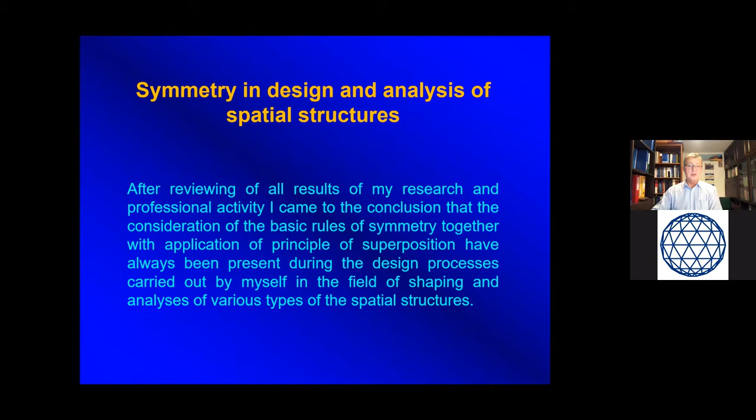The general title of my presentation is Symmetry in Design and Analysis of Spatial Structures. After reviewing the results of my research and professional activity, I came to the conclusion that consideration of the basic rules of symmetry, together with application of the principle of superposition, have always been present during the design processes I carried out in shaping and analysis of various types of spatial structures.

In one of my first projects, I proposed a spherical form of crystal space frame as the support structure of a dome, having an interesting exterior architectonic view and at the same time advantageous conditions for daylighting of its inner space.

Three decades ago, the process of preparing a series of similar technical drawings took me several weeks. During this work, I studied morphological aspects of a very modern structural system of the cable dome proposed by David Geiger. From this time, I had an idea how to design a similar system based on suitable transformation of the spherical form of a space frame.

As a result of my cooperation with the Space Structure Research Center at the University of Surrey, I had the opportunity to study and learn the principles of Formex algebra and the programming language Formian, invented by Professor Hoshyar Nooshin and further developed by his team. My ability to practically apply various functions of Formian has enormously enriched and accelerated my research and professional activity.

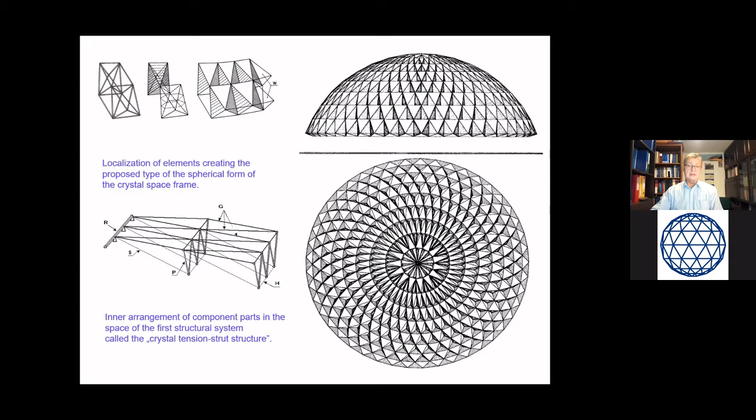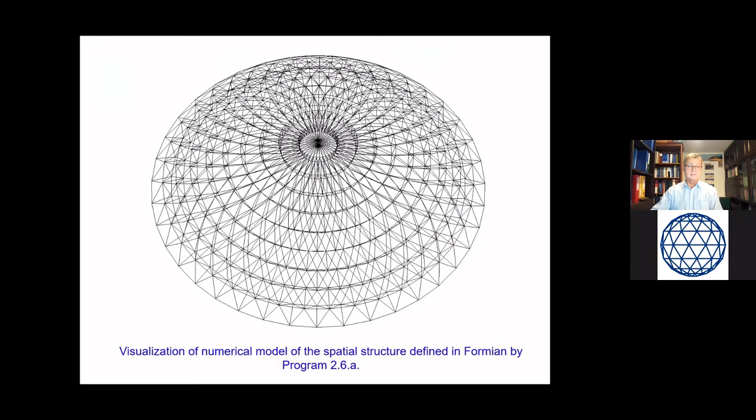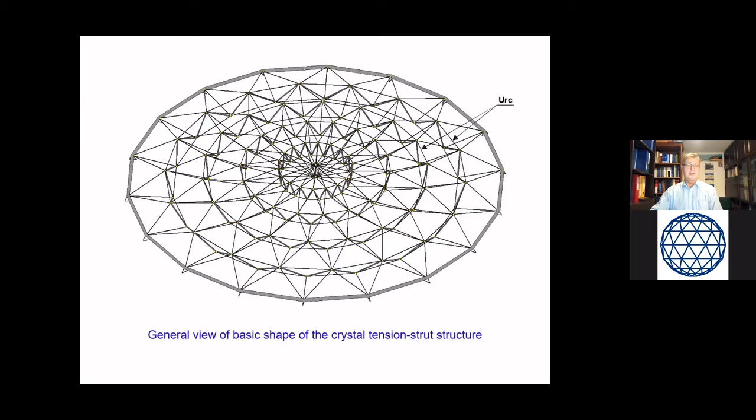The spatial structure is also built of tetrahedral modules, spaced and alternately located over every second lower triangular area of the funicular truss, and suitably connected together as well as to the compression perimeter ring.

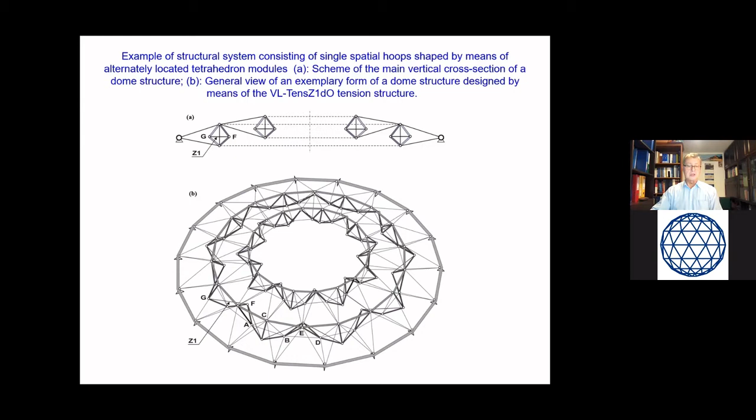The vertices of the tetrahedral modules are joined together by relatively long cables, and together with other tensile members, they create a huge double form of the concentric hoop.

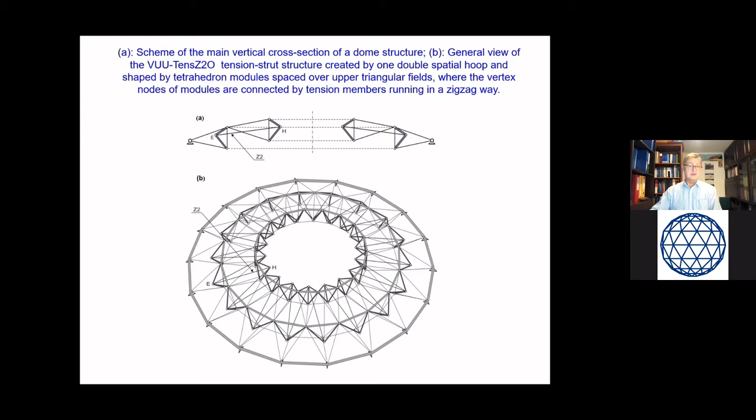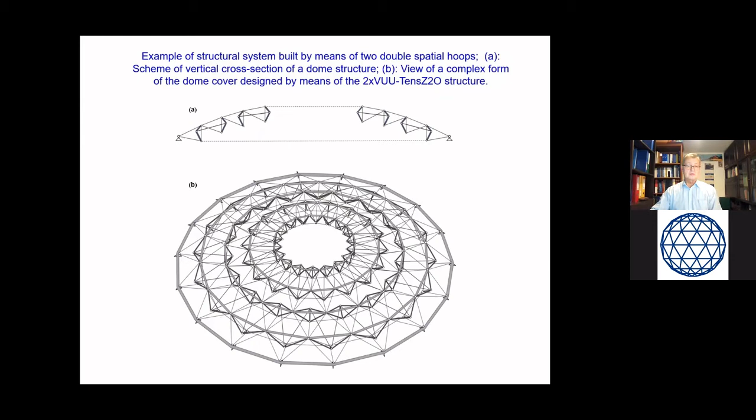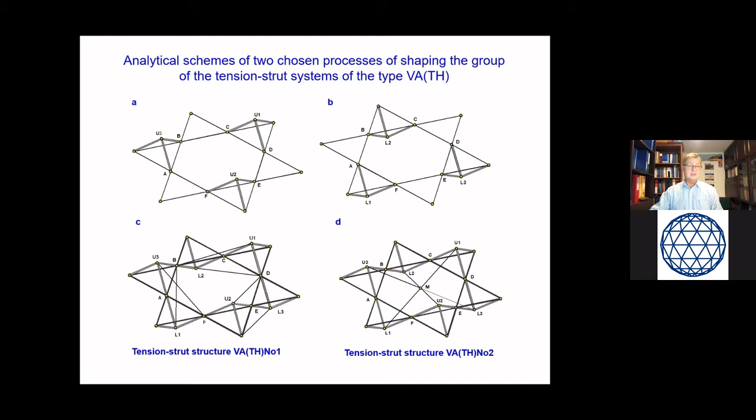The next group of structural systems is shaped by using the same type of tetrahedral modules, arranged this time above and below the triangular hexagonal grid composed of struts located in the middle layer of the created spatial structure. Vertex nodes of these tetrahedrons can be connected in various ways.

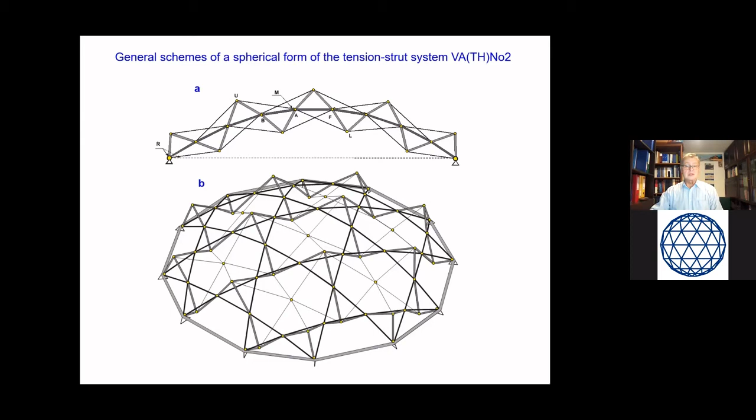In my opinion, the structure VATH number 2 has great development potential, because a suitable arrangement of, for instance, membrane sheets will give a very interesting architectonic form to the roof structure.

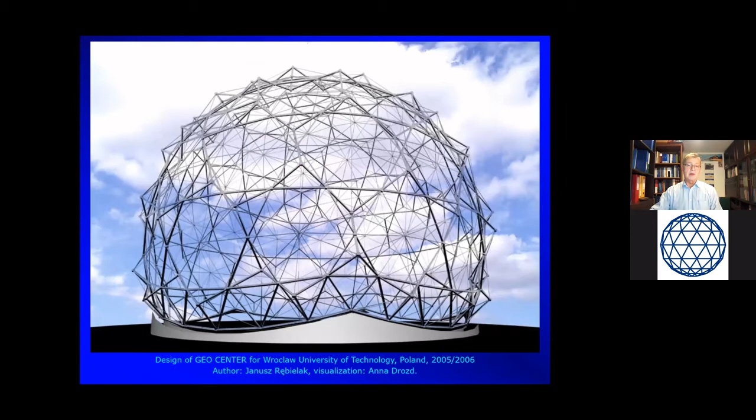That is why I propose the spherical geodesic shape of this system as the support structure of the central building of the previously designed new campus of my alma mater university.

In the conceptual design, the building was intended as a testing object to carry out long-term strength research and also testing of various types of cladding systems.

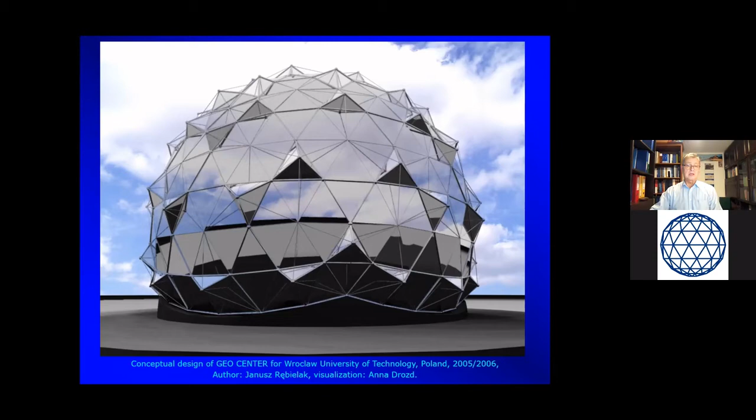Support structures of tall buildings can also be accounted among the wide family of spatial structures. So far, I have proposed two types of foundation structures.

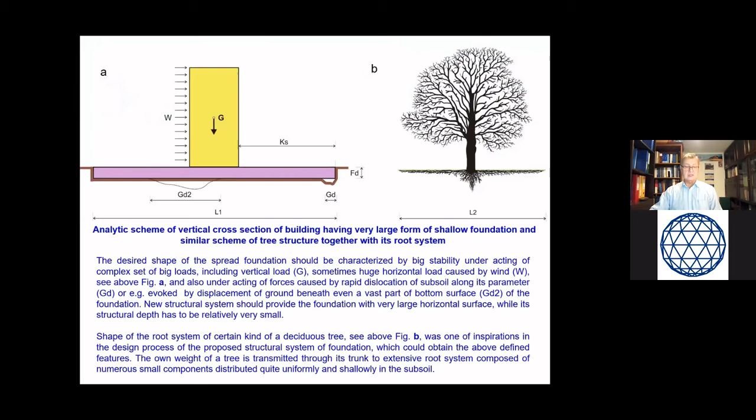The structural concept of the final shape of the system, or of the system of composite foundation, is presented in the next slide. The point of the proposed technical solution is as follows.

In a narrow space between two horizontally located beams, an intermediate structural system is arranged, connected to these beams by means of structural nodes, theoretically articulated nodes or joints, uniformly distributed along the neutral axis of the beams.

Outer force is transmitted via the short vertical member and by means of the intermediate system to the structural nodes. The intermediate system is built of two subsystems. The first one is called a funicular system, located below the neutral axis, while the second one is called an arch system, placed above the neutral axis of these beams.

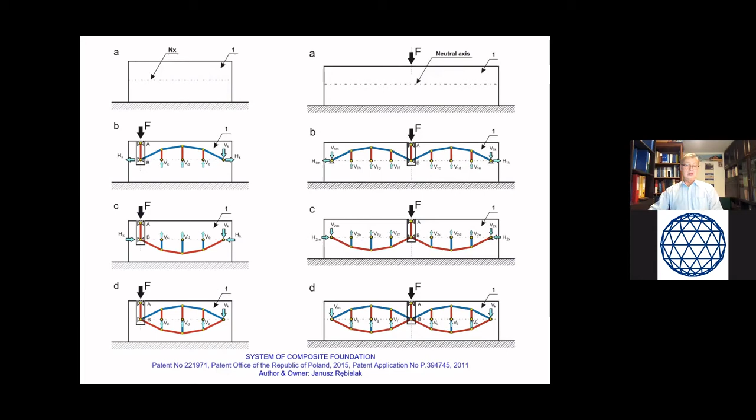When patterns of both subsystems are symmetrical towards the neutral axis, and when they are combined together, they create only vertical components of reactions acting in the boundary areas. The loads can be applied in various symmetrical, eccentrical ways.

Nodes of the type C1 and C2 mustn't be connected to the main beams of the structure. The lenticular form of the intermediate system placed between these two nodes is considered as the modular unit of the foundation. It can be repeated many times along the horizontal direction.

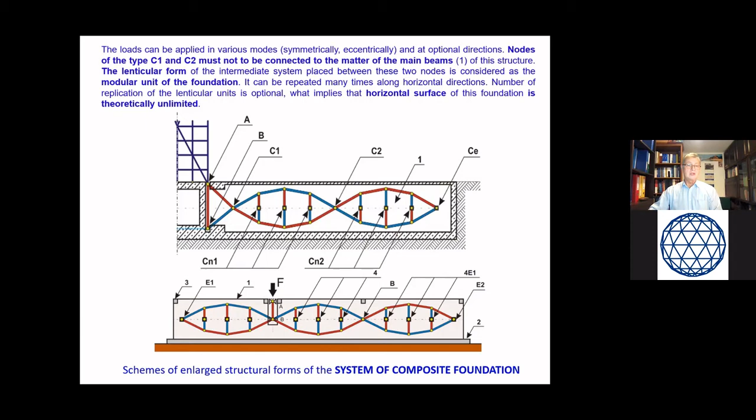Number of replication of the lenticular units is optional, which implies that the horizontal surface of this foundation can be theoretically unlimited. This structural system of composite foundation can be a base for various shapes of megastructures.

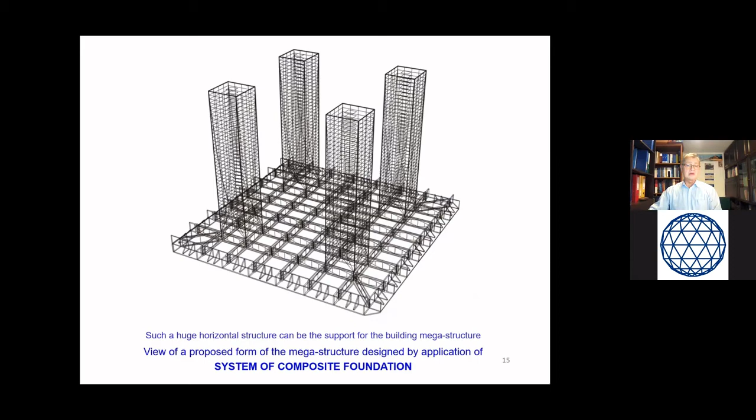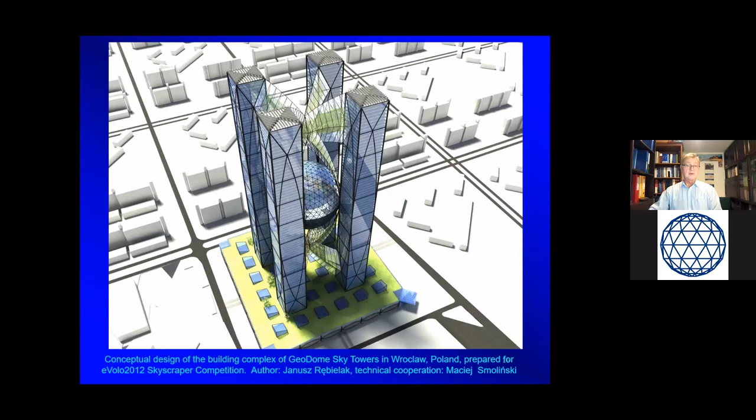I have proposed this system of foundation as a structural base in the conceptual design of a megastructure called the Geodome Sky Towers, prepared for one of the architectonic competitions. The towers are of height around 380 meters.

The support base has the form of a square. Its edge length equals around 250 meters. The geodesic sphere has a diameter equal to 100 meters.

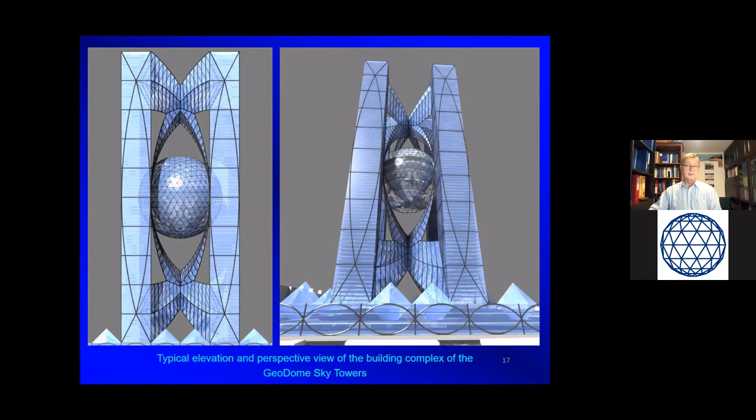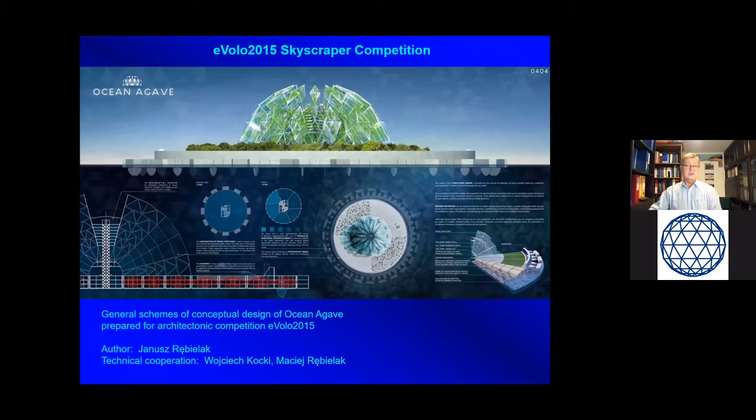I have proposed again the system as the base structure of an artificial island in the conceptual design entitled Ocean Agave, prepared for another issue of the series of architectonic competitions.

It is designed as a floating structure in subtropical ocean areas, far from land, being a settling unit self-sufficient in terms of energy and food supply, able to house a group of around 150 persons. The circular platform of the Ocean Agave has a diameter slightly more than 400 meters.

Spatial modules of this system of combined foundation can be made as huge waterproof boxes having substantial uplift pressure. That is why they could be the component parts of an artificial island able to float on a lake or on a sea.

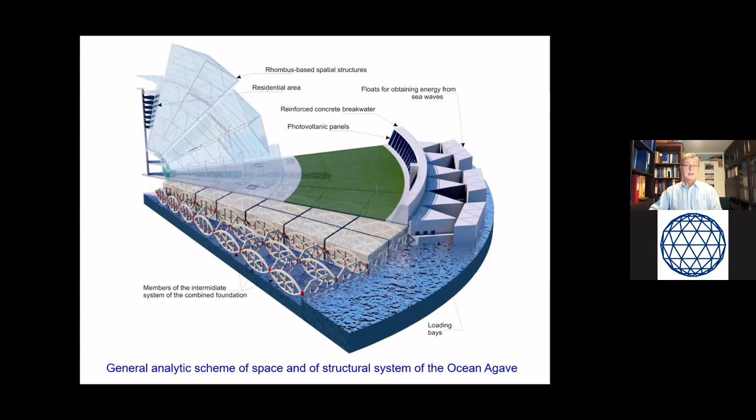Taking into consideration the basic rules of symmetry is also very helpful in the methods of static calculations. During my research stay at the Delft University of Technology, I was given a task to do an initial static analysis of one of the tension-strut structures proposed in my doctoral thesis.

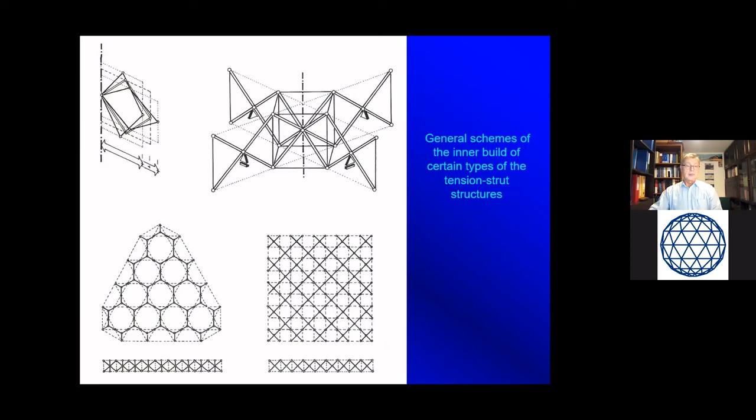Beforehand, I was required to do a physical model of it. The static scheme on the left-hand side of this slide shows a simplified cross-section of the structure, representing a fourfold statically indeterminate tension-strut truss.

When that system is overloaded, the four members of the top chord are slackened, which implies they are excluded from the force transmission. Therefore, the scheme of the overloaded structure shown on the right-hand side represents a statically determinate truss or system. The number of excluded tension members equals 4, equal to the statically indeterminacy of the basic truss system.

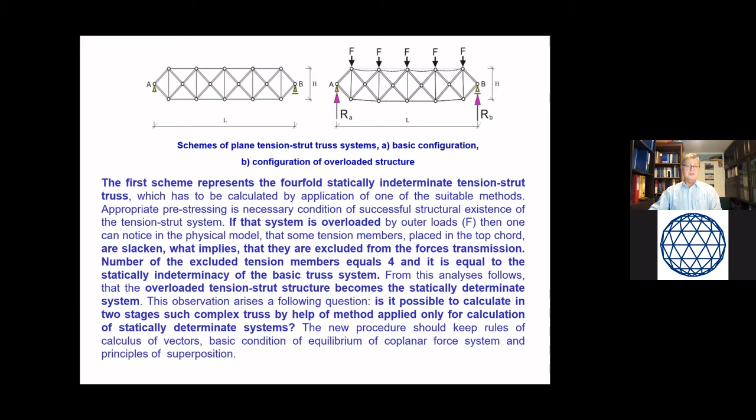This observation raises a following question: is it possible to calculate in two stages such a complex truss by help of a method applied only for calculation of statically determinate systems? The answer to the question is presented on this slide.

In the first stage, one should remove a number of members equal to the statically indeterminacy from the top chord of the basic truss, which results in the truss having the scheme shown in the central set of diagrams. That form of the statically determinate truss has to be loaded by forces having half the values of the load forces applied to the basic truss.

A very similar procedure has to be done in the second stage. In each stage, one can use, for instance, the Cremona or the Ritter's method.

Because these methods don't take into consideration the stiffness differences between members, the just-presented two-stage method may give in the result only approximate values of forces.

The final values of these forces acting in members of the basic truss will be the resultants of the values of forces detected in each stage, in members having the counterpart positions in the statically determinate trusses. This is dictated by the principle of superposition and the rules of the calculus of vectors.

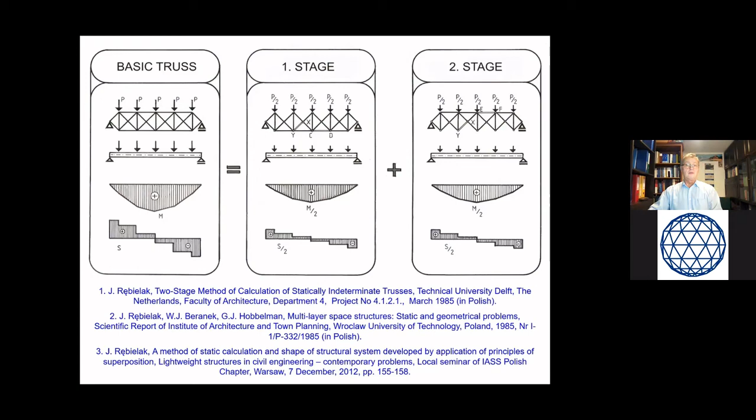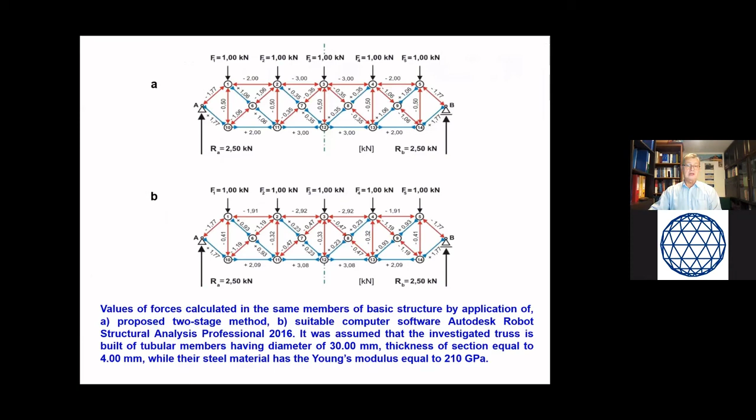The differences between the force values calculated in the same truss members by the application of these two different methods are rather small. From comparative analysis of the results obtained in both calculation methods, it follows that the two-stage method can be applied as an approximate method of calculating statically indeterminate trusses.

As I have previously pointed out, I apply FEM in all fields of my research and professional activity. I am still an aviation enthusiast, being a participant of a series of special scientific conferences. I was encouraged to present a structural concept of an airplane which I initially designed in my youth. The main purpose of the proposed structure was striving after getting an airplane with a large range of flight speed, in particular a high cruising speed, using a propulsion system of relatively low power. In the next few slides, the structural concept is presented.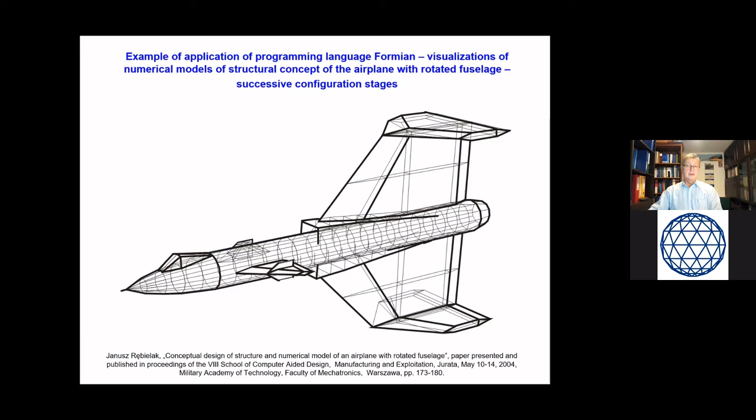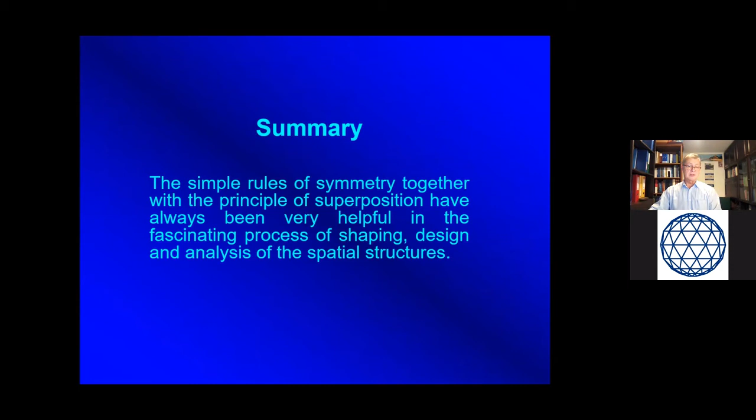Of course, they will be symmetrical, and for sure I will apply Formian for defining numerical models of them. I hope that after this presentation you can share, even partly, my opinion that the simple rules of symmetry, together with the principle of superposition, have always been very helpful in the fascinating process of shaping, design, and analysis of spatial structures.